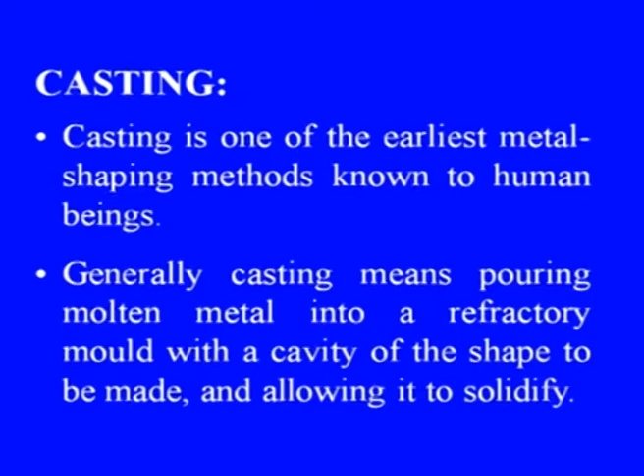Casting is one of the earliest metal shaping methods known to human beings. Generally, casting means pouring molten metal into a refractory mold with a cavity of the shape to be made and allowing it to solidify. Once solidified, the object is taken out from the mold either by breaking or by taking the mold apart. The solidified object is called a casting.

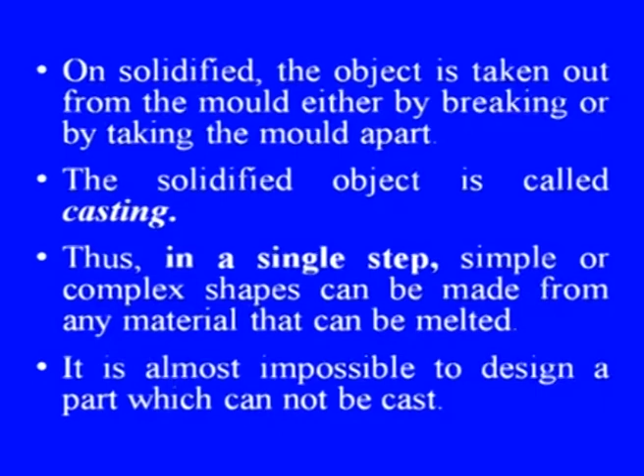Thus, in a single step, simple or complex shapes can be made from any material that can be melted. It is almost impossible to design a part which cannot be cast. Let us see a formal definition of casting. I quote, "A casting is a shape obtained by pouring liquid material into a mold or cavity and allowing it to freeze and thus to take the form of the mold." Unquote.

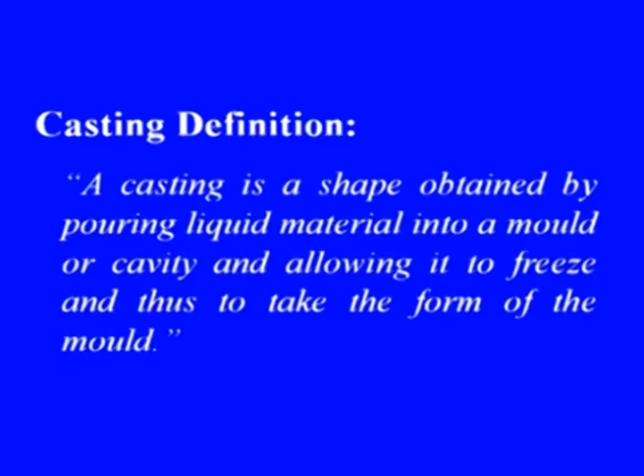Let us peep into a little historical background of this process. Casting was probably discovered around 3500 BC in Mesopotamia. These molds were essentially of a single piece. The Bronze Age, which is estimated at 2000 BC, brought more refinement into the casting process.

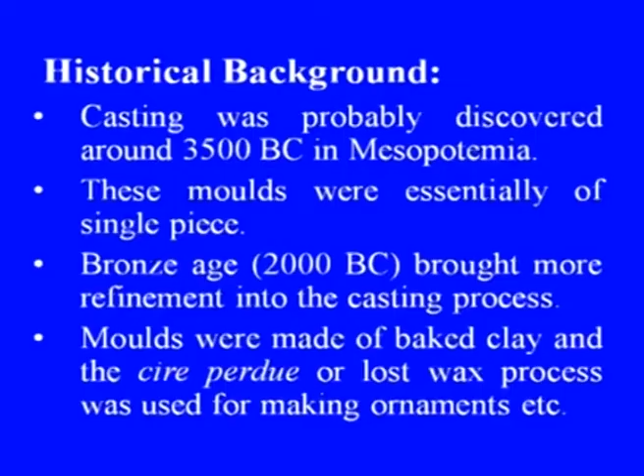Molds were made of baked clay, and the cire perdue or lost wax process was used for making ornaments, etc. The technology was greatly improved by the Chinese from around the year 1500 BC. The Indus Valley civilization has evidence of cast products too. Here is a photograph of a cast mold.

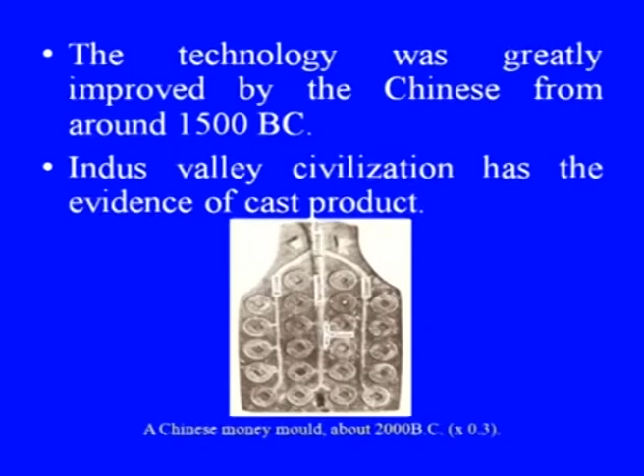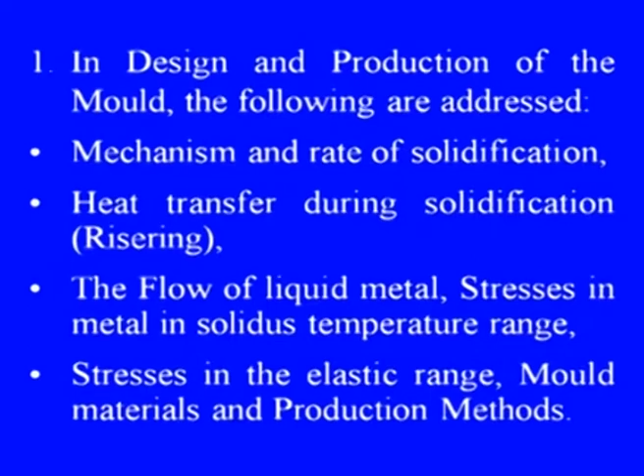Now, let us see the casting problem. The casting problem can basically be divided into two areas: number 1, the design and production of the mold, and number 2, the melting, refining, and pouring of the liquid metal. In design and production of the mold, the following are addressed: mechanism and rate of solidification, heat transfer during solidification, the flow of liquid metal, stresses in the metal in the solidus temperature range, stresses in the elastic range, mold materials and production methods.

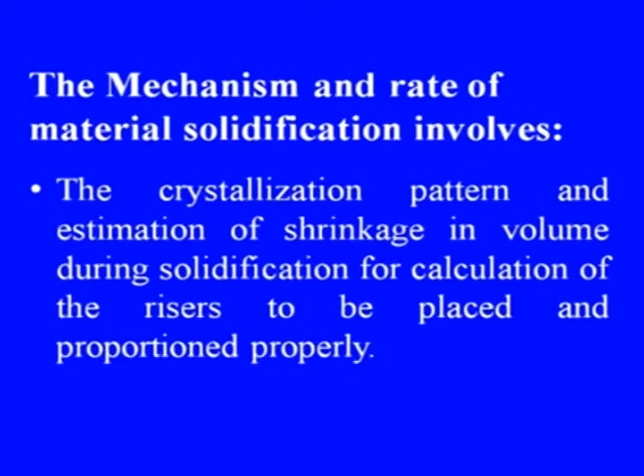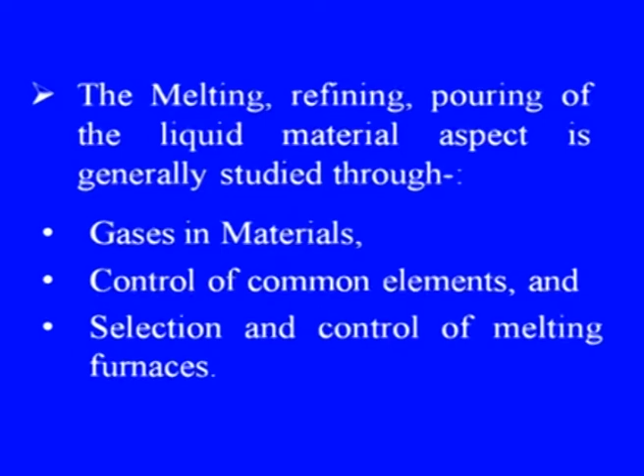The mechanism and rate of material solidification involves the crystallization pattern and estimation of shrinkage in volume during solidification for calculation of the risers to be placed and proportioned properly. These factors vary considerably depending upon the chemical composition of the material and thermal gradients in the mold. Thus, in this process, engineering analysis tools can help significantly. The melting, refining, and pouring of the liquid material is generally studied through number 1, gases in materials, number 2, control of common elements, and number 3, selection and control of melting furnaces.

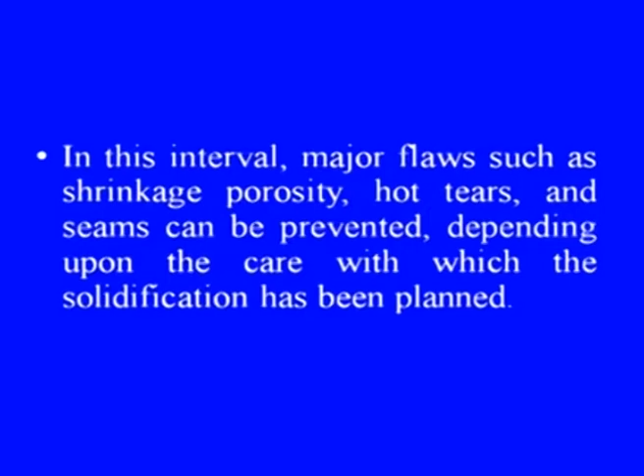Now, let us look into the solidification process. The time taken for solidification of a casting is a relatively very brief period in the entire production history. During this short time, the original crystal structure of the casting is formed, which is considered the backbone of the casting, on which many other properties depend. In this interval, major flaws such as shrinkage porosity, hot tears and seams can be prevented depending upon the care with which the solidification has been planned.

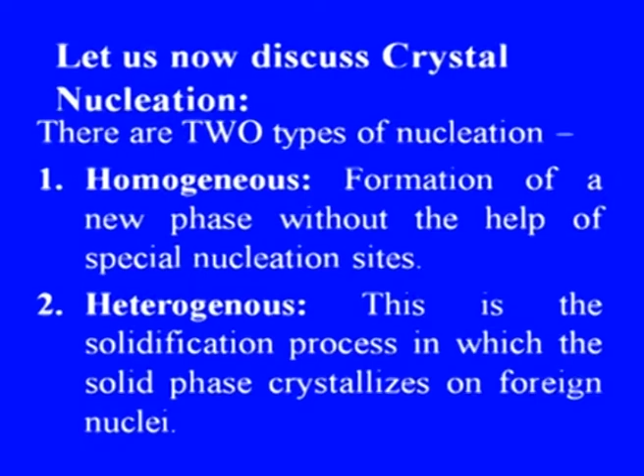Let us now discuss the crystal nucleation process. There are two types of nucleation. Number 1, homogeneous nucleation. Homogeneous nucleation is the formation of a new phase without the help of special nucleation sites. Number 2, heterogeneous nucleation. In the heterogeneous nucleation process, the solid phase crystallizes on foreign nuclei.

The temperature at which homogeneous nucleation takes place is always below the equilibrium freezing point, because it is necessary to overcome the surface tension forces which slow down nucleus growth. The energy required to produce a nucleus of solid is the difference in free energy per unit volume between the liquid and the solid phases. This energy, also called the bulk free energy change, is designated as delta F(V), which is expressed in calories per cubic centimeter for a given temperature of supercooling.

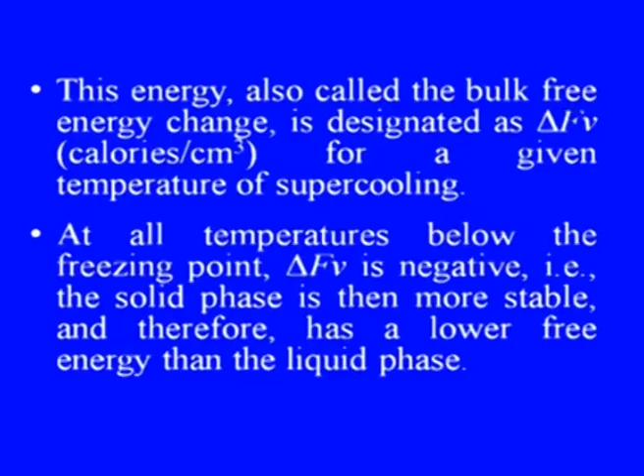At all temperatures below the freezing point, delta F(V) is negative, that is, the solid phase is then more stable and therefore has a lower free energy than the liquid phase. The bulk free energy change associated with the formation of a spherical particle of radius r is given by 4/3 pi r cube into delta F(V).

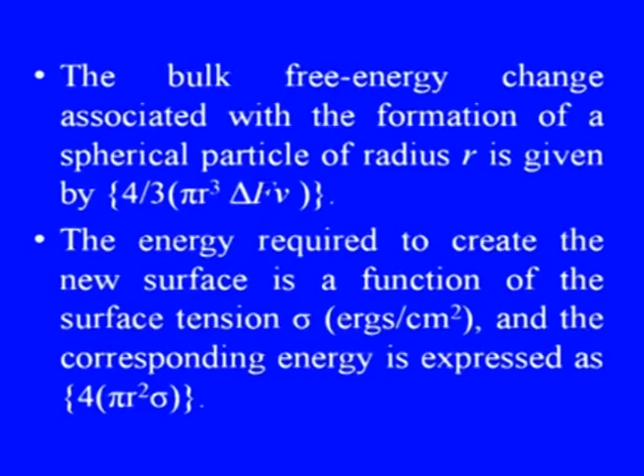The energy required to create the new surface is a function of the surface tension sigma, which is expressed in ergs per centimeter square, and the corresponding energy is expressed as 4 pi r square into sigma. The net free energy change, delta F, is then expressed as delta F equals 4 pi r square sigma plus 4/3 pi r cube delta F(V).

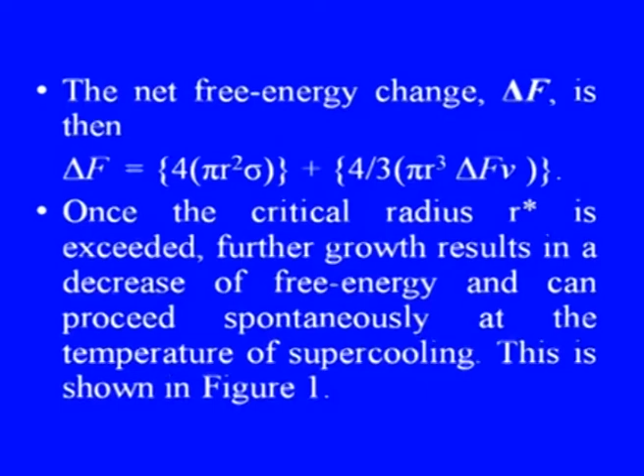Once the critical radius r star is exceeded, further growth results in a decrease of free energy and can proceed spontaneously at the temperature of supercooling. This is shown in figure 1. Here, this is the critical radius r star.

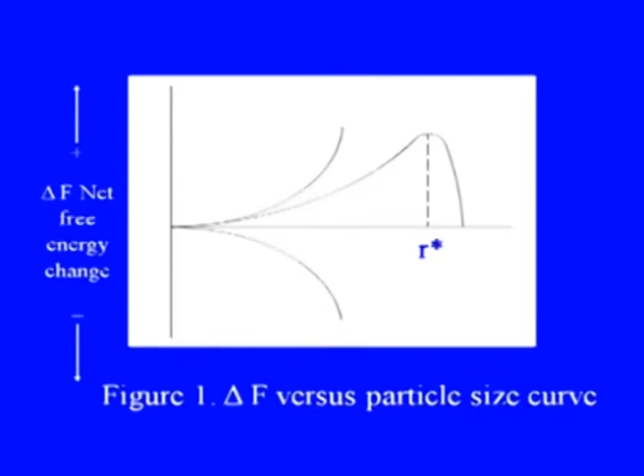If a particle has a radius smaller than r star, it will redissolve because this decrease in size reduces the free energy. The size of the critical radius may be found by differentiating the above relationship with respect to r and setting the result equal to 0, which then yields r star to be equal to minus 2 sigma by delta F(V).

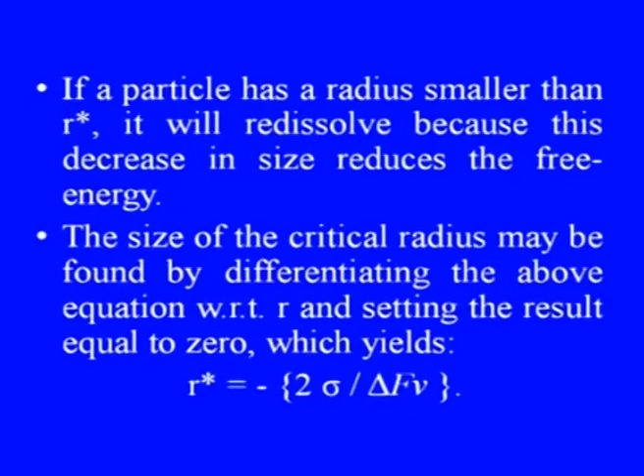The r star relation indicates that for r star to become very small, delta F(V) must become very large in a negative sense. That is, severe supercooling is needed for homogeneous nucleation. Also, the term sigma does not change greatly with temperature. On the other hand, delta F(V) increases with supercooling and therefore causes a very small nucleus to be stable.

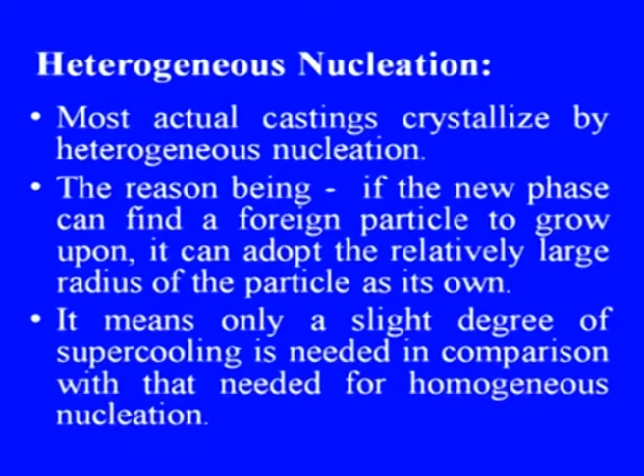Let us come into the heterogeneous nucleation process. Most actual castings crystallize by the heterogeneous nucleation process. The reason being, if the new phase can find a foreign particle to grow upon, it can adopt the relatively large radius of the particle as its own. It means only a slight degree of supercooling is needed in comparison with that needed for homogeneous nucleation.

Quantitatively, the relation depends upon the degree to which the new phase wets the foreign particle. If there is no attraction between the atoms of the foreign particle and those of the precipitating phase, then nucleation is not helped. The wall of a mold usually provides many heterogeneous nucleation sites. That is how the solidification process begins.

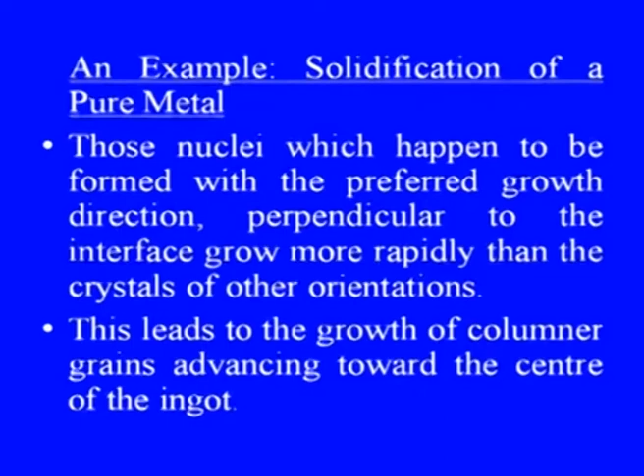Let us see an example of solidification of a pure metal. Those nuclei which happen to be formed with the preferred growth direction perpendicular to the interface grow more rapidly than the crystals of other orientations. This leads to the growth of columnar grains advancing towards the center of the ingot. The final structure therefore consists of a thin layer of randomly oriented grains at the mold surface and columnar grains extending to the center line. In this situation, there are no randomly oriented grains at the center of the ingot.

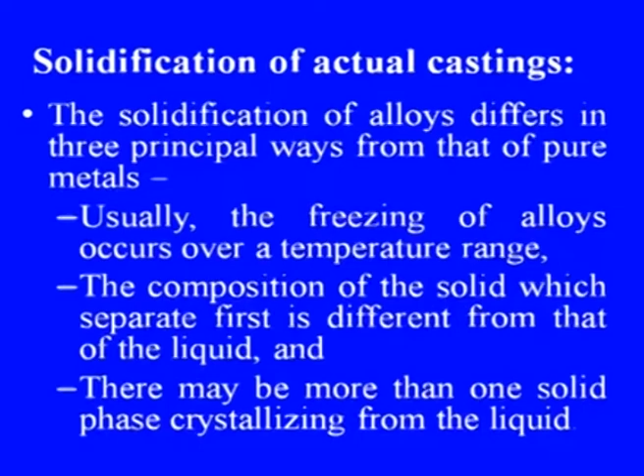Solidification of actual castings. The solidification of alloys differs in three principal ways from that of pure metals. Number 1, usually the freezing of alloys occurs over a temperature range. Number 2, the composition of the solid which separates first is different from that of the liquid. And number 3, there may be more than one solid phase crystallizing from the liquid.

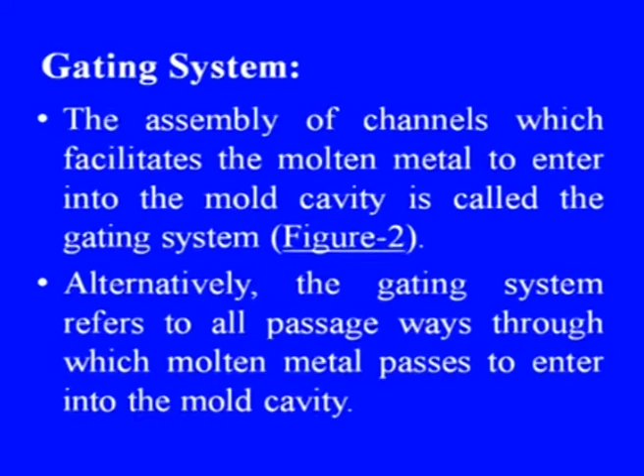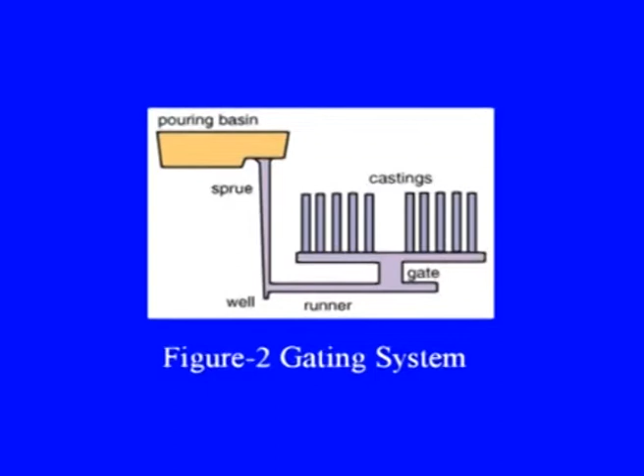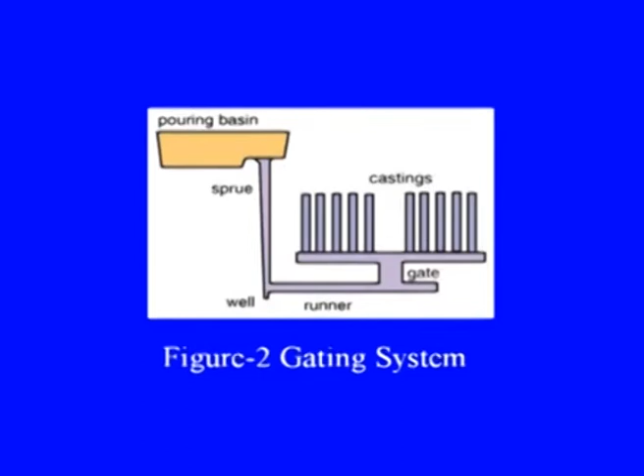Now, let us see a gating system. The assembly of channels which facilitate the molten metal to enter into the mold cavity is called the gating system. This is shown in figure 2. Alternatively, the gating system refers to all passageways through which molten metal passes to enter into the mold cavity. This is a typical gating system in which this is the pouring basin. The molten metal comes through the sprue, which is constructionally tapered in shape. Then the liquid metal is distributed through this gating system into the various cavities.

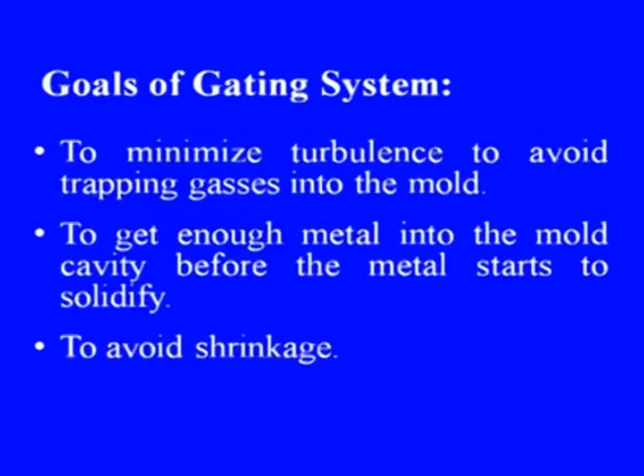What are the goals of the gating system then? This is to minimize turbulence to avoid trapping gases into the mold. Then to get enough metal into the mold cavity before the metal starts to solidify. Then another goal is to avoid shrinkage. To establish the best possible temperature gradient in the solidifying casting, so that the shrinkage, if it occurs, must be in the gating system, not in the required cast product. Thereby, it helps in retaining the appropriate or desired tolerances.

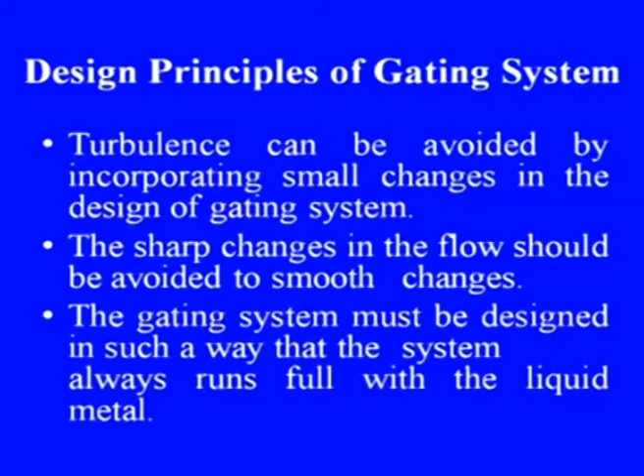It also incorporates a system for trapping the non-metallic inclusions. The major design principles of the gating system are as follows. Turbulence can be avoided by incorporating small changes in the design of the gating system. Sharp changes in the flow should be avoided in favor of smooth changes. The gating system must be designed in such a way that the system always runs full with the liquid metal. In gating system design, sharp corners should be avoided. Any changes in direction or cross sectional area should make use of rounded corners.

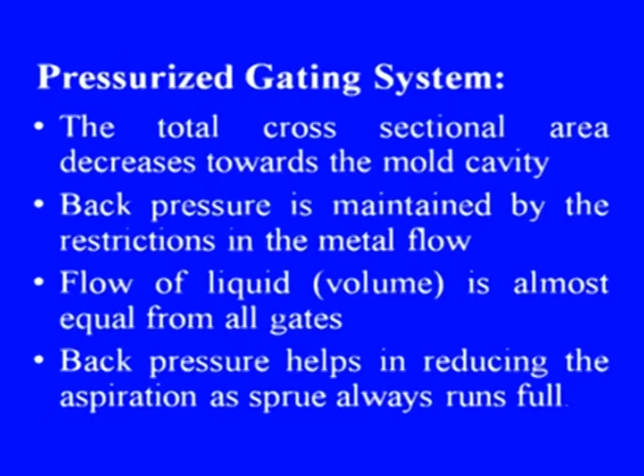To avoid aspiration, tapered sprues are designed in the gating systems. A sprue tapered to a smaller size at its bottom will create a choke, which will help keep the sprue full of molten material. Types of gating systems. The gating systems are of two types: pressurized gating system and unpressurized gating system. In the pressurized gating system, the total cross sectional area decreases towards the mold cavity. Back pressure is maintained by the restrictions in the metal flow. Flow of liquid is almost equal from all gates. Back pressure helps in reducing the aspiration, as the sprue always runs full.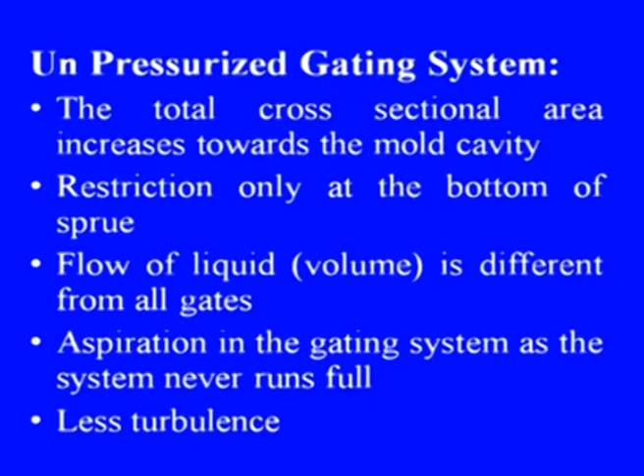Because of the restrictions, the metal flows at high velocity, leading to more turbulence and chances of mold erosion. In an unpressurized gating system, on the other hand, the total cross sectional area increases towards the mold cavity. Restrictions are only at the bottom of the sprue. Flow of liquid is different from all gates. Aspiration in the gating system, as the system never runs full, there is less chance of turbulence.

Now, let us consider the risering system. A riser is a reservoir of extra metal which flows from the riser to the mold cavity to compensate for shrinkage, which takes place in the casting when it starts solidifying. Without a riser, heavier parts of the casting will have shrinkage defects either on the surface or internally. Risers are known by different names such as metal reservoirs, feeders or headers.

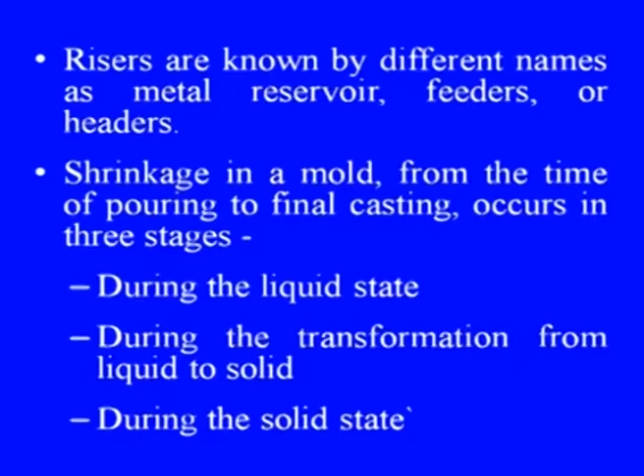Shrinkage in a mold from the time of pouring to final casting occurs in 3 stages. Number 1, during the liquid state. Number 2, during the transformation from liquid to solid, and number 3, during the solid state. The first type of shrinkage is compensated by the feeders or the gating system. For the second type of shrinkage, risers are required. Risers are normally placed at that portion of the casting which is last to freeze. A riser must stay in liquid state at least as long as the casting and must be able to feed the casting during this time.

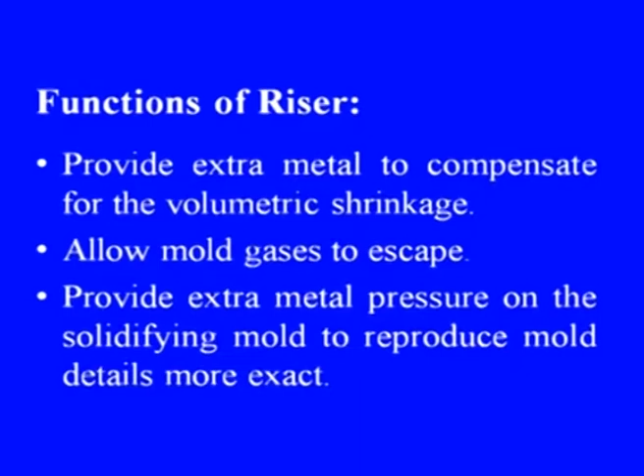Now, let us see the functions of a riser. It provides extra metal to compensate for the volumetric shrinkage. Then, risers allow mold gases to escape. They provide extra metal pressure on the solidifying metal to reproduce mold details more exactly.

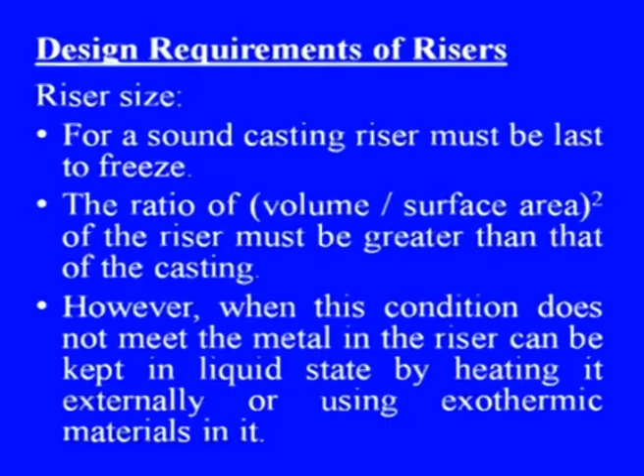Now, what are the design requirements of risers? First is the riser size. For a sound casting, the riser must be the last to freeze. The ratio of volume to surface area of the riser must be greater than that of the casting. However, when this condition is not met, the metal in the riser can be kept in liquid state by heating it externally or using exothermic materials in it.

The way the riser is connected to the casting is very important. The connection, called the neck, should solidify first, so that the shrinkage cavity is located in the riser itself. The removal of the riser can be made simpler by making the neck smaller. But if the neck is too small, it might get solidified earlier than the casting, hence defeating the whole purpose. A normal practice is to provide a thin ceramic or core material for the neck to reduce the cross sectional area. These are called Washburn cores.

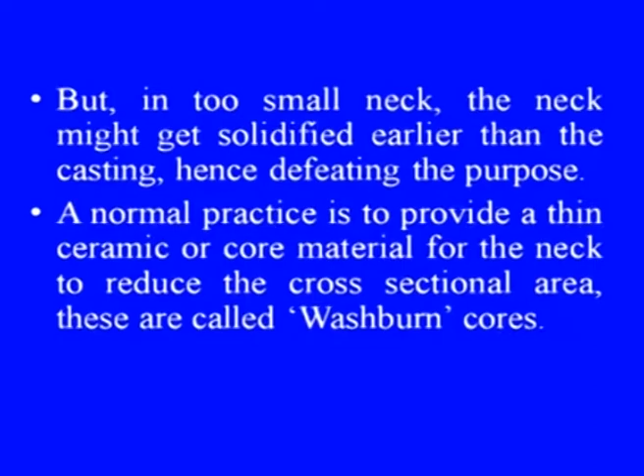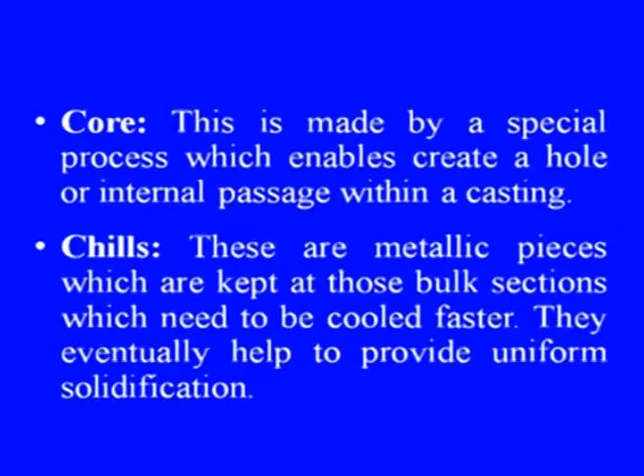Then chills. These are metallic pieces which are kept at those bulk sections which need to be cooled faster. They eventually help to provide uniform solidification. In other words, in heat transfer terminology, we can call these nothing but some kind of heat sinks, like we use fins in some cases. So, these metallic materials provide a larger area which is in contact with the heated object or in the vicinity of the heated object, so that the rate of heat transfer can be faster. As we know, rate of heat transfer is proportional to the area of heat transfer. Therefore, this is nothing but a technique to enhance the heat transfer area.

So, what is the advantage of this? The advantage is, as the rate of heat transfer becomes faster, the solidification can be homogeneous. Otherwise, in some cases where the section is thicker, the quantity of molten material is higher, and therefore it may take more time to get solidified, or rather to reject the heat from the molten metal and thereby get solidified. However, with the use of chills, this can be avoided, by providing a higher area for heat transfer, and thereby the rate of cooling becomes faster, and consequently the entire body of the casting can get cooled at a more uniform rate with that of the thin sections, which are in any way getting cooled fast.

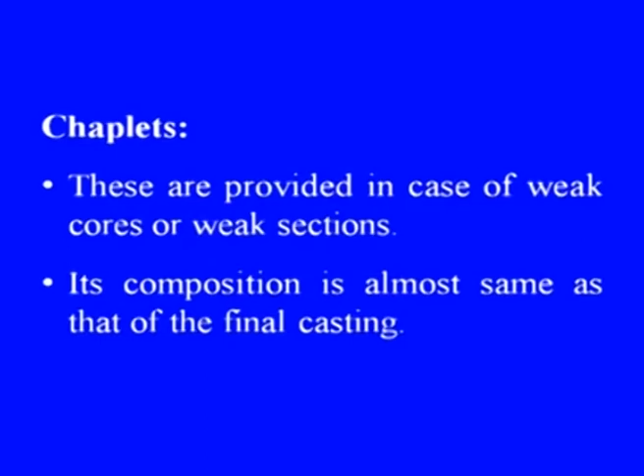Another important term quite often used is chaplets. These are provided in case of weak cores or weak sections, as we have just now discussed. The cores are nothing but some holes or the passages provided. So, therefore, by providing passages, in some cases it may so happen that the section becomes very weak, which may not eventually be possible to withstand the load of molten metal. Therefore, these chaplets are used to strengthen these weak sections.

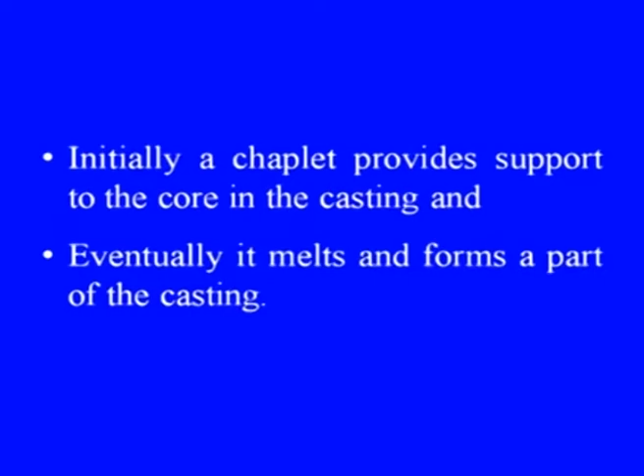Its composition is almost the same as that of the final casting, so that the diffusion or other problems are minimized. Initially, a chaplet provides support to the core in the casting, and eventually it melts and forms a part of the casting. That is why a similar composition is preferred, so that the cast product does not lose the properties, or the properties of the final product do not deviate from what is designed.

Another important one is the pattern, which we will be using almost in every session that will be discussed in this module. It is the replica of the required cavity or shape. It resembles the required casting with allowances in it. It is made of wood, metal, wax or plastics as the situation permits. Say, for example, if we use wax, it is lost because of coming in contact with the very high temperature molten material. On the other hand, if metallic patterns are used, they can be reused for several cycles.

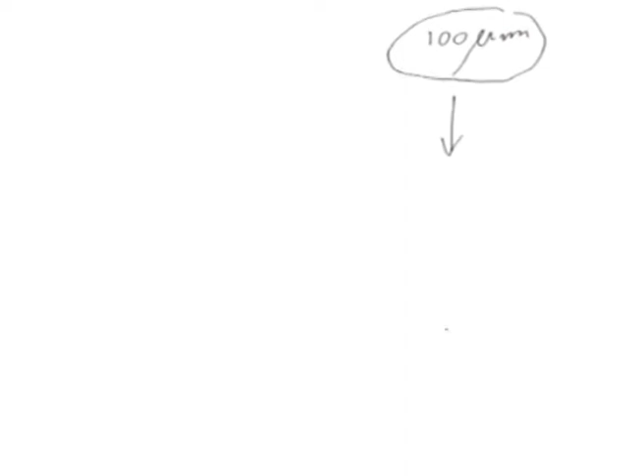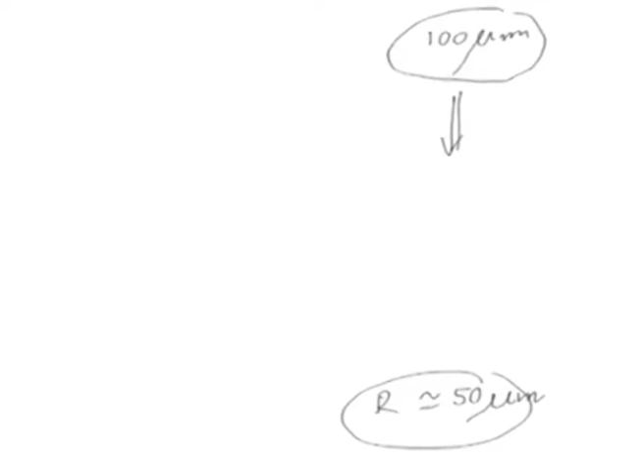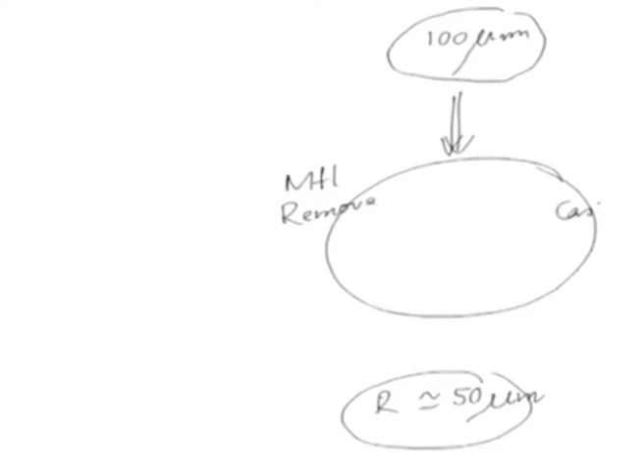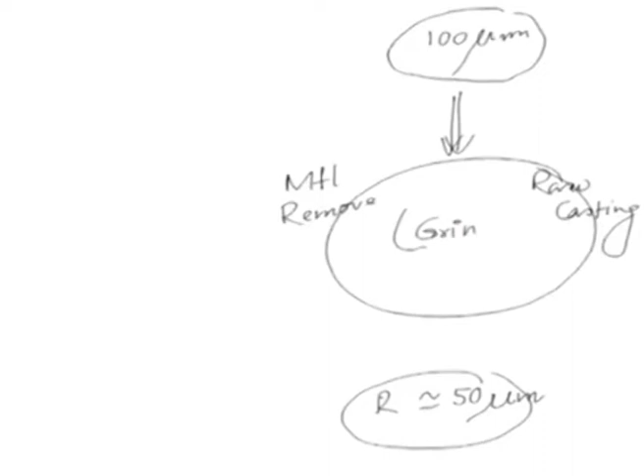Another important aspect in this pattern is the final finishing. Some of the patterns may need post processing, say, for example, to achieve some prerequisite surface finish, say from Ra equal to 100 micrometer to Ra equal to 50 micrometer. What I need is, in between, some reworking, where I have to remove some material from the original cast, or we can say this is the raw casting. This process may be, say, grinding or some other finishing process.

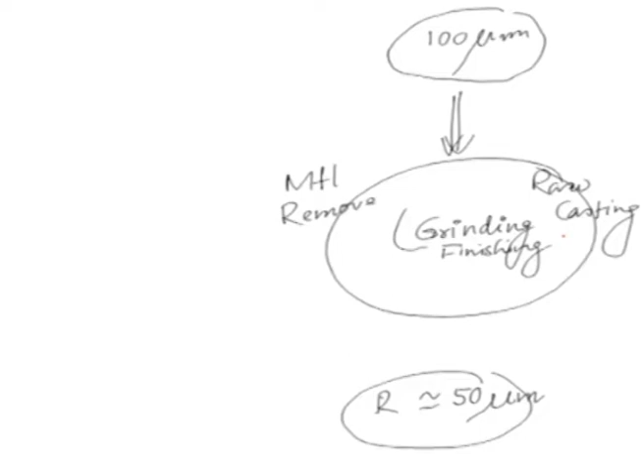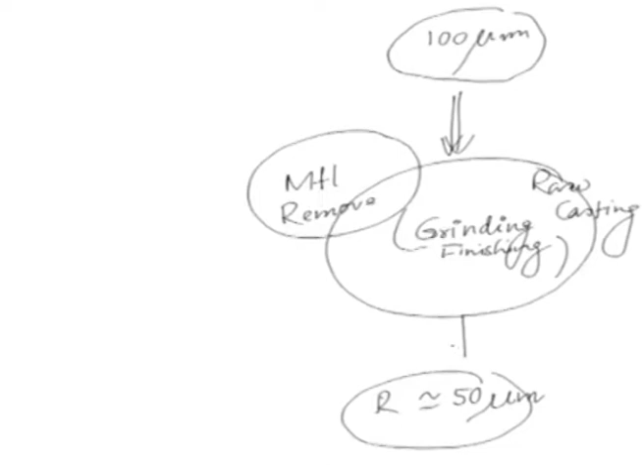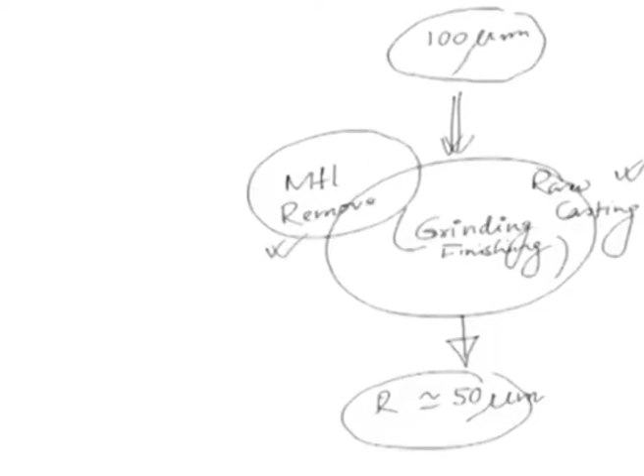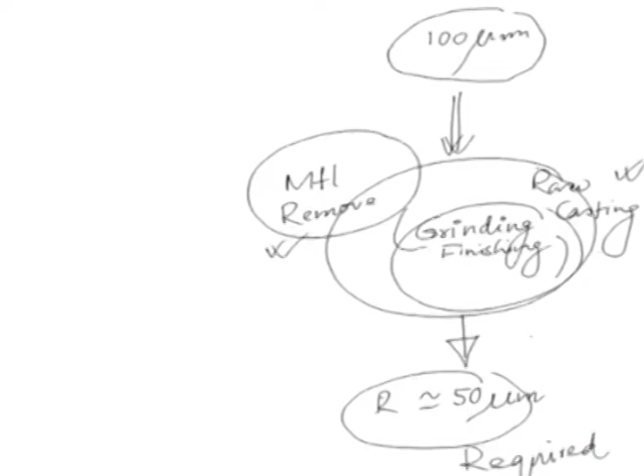Now, from where will this additional material be sacrificed? This indicates that we may have to allow some additional material in the raw casting itself. That means the pattern has to be made a little oversized, so that it produces a little bigger casting than required, and this additional material will be removed as part of the finishing process, as we have discussed here, which will ultimately give us the required dimension. This is the required dimension.

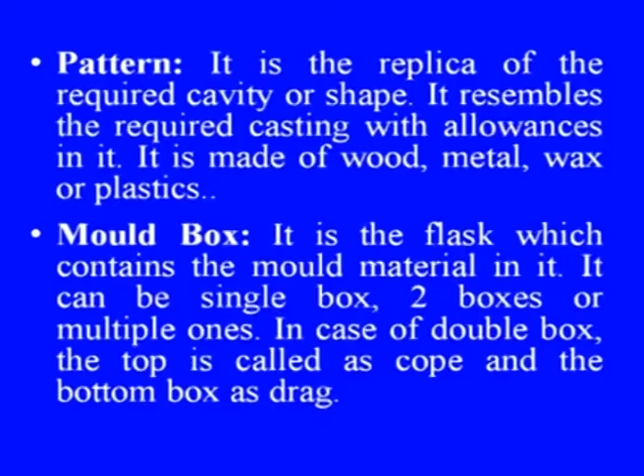Another important term very closely associated with molding technology or casting technology is the mold box. It is the flask which contains the mold material in it. It can be a single box or two boxes or multiple ones. In case of a double box, the top is called the cope and the bottom box is called the drag. Then molding material. In most cases, sand is the desired molding material, since it has high refractory property as well as being cheap. Sand is mixed with other ingredients as desired, like to make it more flowable, or in some cases to make it more binding, binders are used, and so on.

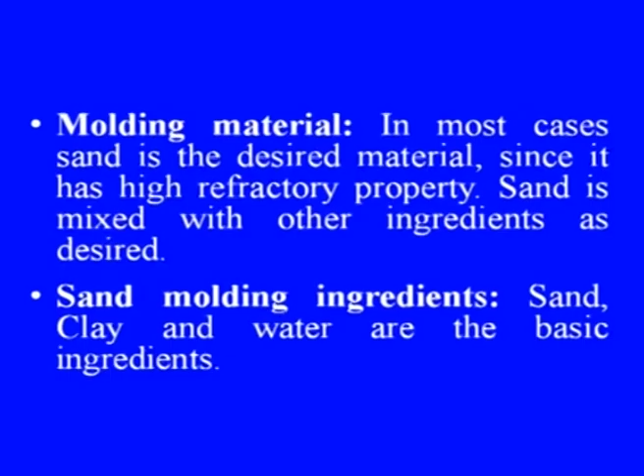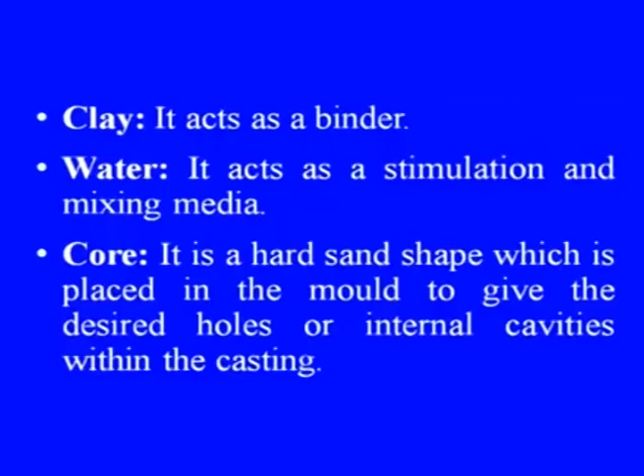Then sand molding ingredients. These are sand, clay and water. These are some of the ingredients. In some cases, some other materials as binder are also used, like clay content, etc., to give the binding properties. Then the core. What is a core? It is a hard sand shape which is placed in the mold to give the desired holes or internal cavities.

What is a core print? This is another important term. It is the region added to the core or pattern, usually at its ends, which helps it to seat in the cavity in the proper region. Then core seat. The corresponding section in the mold where the core print gets located is called the core seat.

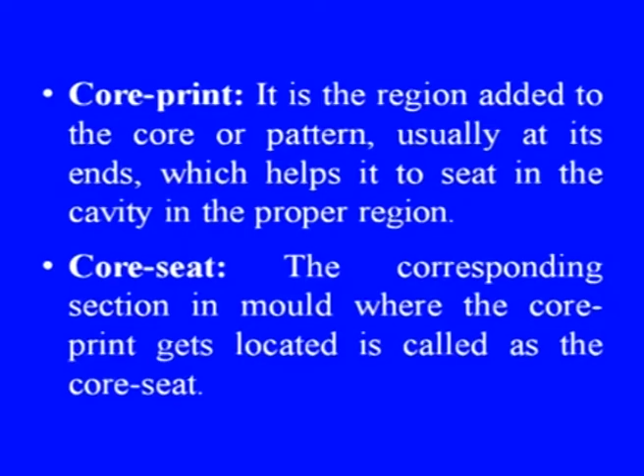Another important term is ladle. Ladle is a device having a crucible with handles at its ends. It is used to carry the molten metal from the furnace to the molds. There are different types of ladles to suit different requirements. So, this is a generalized picture as displayed on the screen.

So, here we can notice, as we have already indicated, this is the largest section of this particular casting, as the figure shows. Therefore, it ideally contains more quantity of molten material, and it will take longer to solidify, because the heat content will be high and this contained heat has to be transferred out, provided the area through which the heat is transferred remains the same.

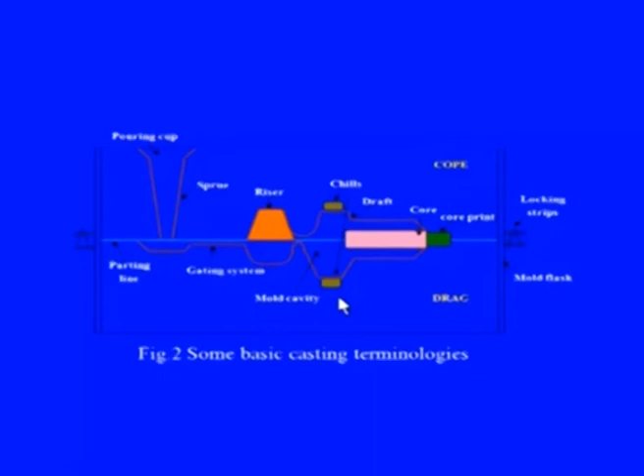To improve upon this situation, because this casting has different sections, some sections are relatively smaller than this section. Therefore, there is a possibility that the thinner sections will solidify earlier than the larger sections. To eliminate this inhomogeneity in solidification, these chills are provided, as can be seen here. These are metallic plates which act as heat sinks and provide a better heat transfer rate in these large sections, so that the non-uniformity in the rate of heat transfer at different sections of the casting is reduced.

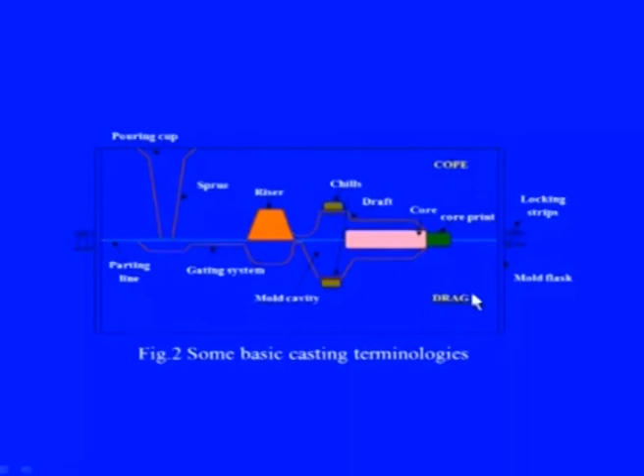And as far as the box is concerned, I was talking about it just a few minutes back. In this particular figure, there are two boxes provided. One is called the cope, the top box, and this is the parting line, and this lower half of the box is called the drag. Next is the pouring cup or pouring basin. This we have seen in the figure just now. It is the initial region in the gating system which first receives the molten metal from the ladle and allows it to move through.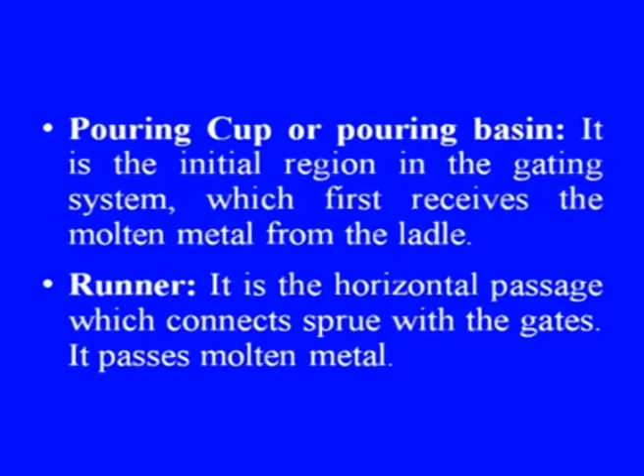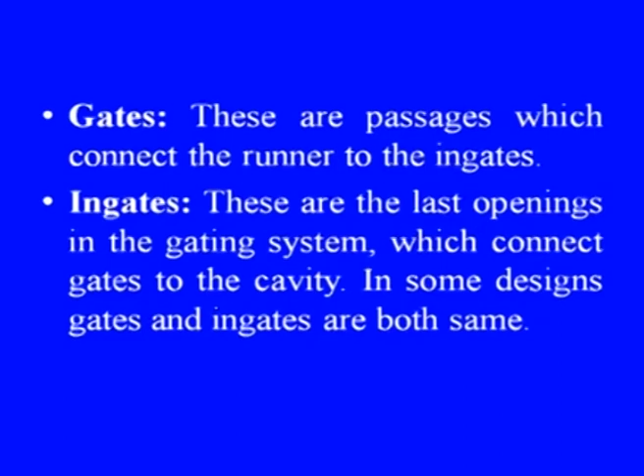Then the runner, it is the horizontal passage which connects the sprue with the gate. It passes molten metal to the subsequent sections. Then the gate, these are passages which connect the runner to the ingate. Ingates are the last openings in the gating system which connect the gate to the cavity. In some designs, the gate and ingate are the same. So, this is a typical gating system we were talking about.

So, this is the sprue, and this is the pouring cup, and from the ladle the liquid molten material will be poured here. This will facilitate the molten material to flow through, and this is the gate through which the material will be delivered to the cavity where the casting is to be produced, and these are the ingates. A number of branches are created so that the distribution of the molten material will be at a uniform rate, and of course, this will help in maintaining uniform temperature as far as possible while delivering.

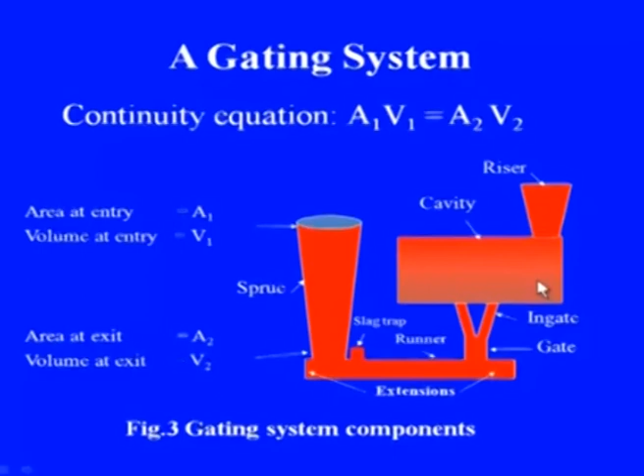And this is the riser, which provides additional molten material so that during solidification, if the molten material shrinks, which usually happens, since liquid occupies more volume in most cases and the volume shrinks during solidification, then to fill the remaining portion, this riser provides additional molten material which it keeps as a reserve, so that no void or volume is left unfilled inside the casting because of the solidification.

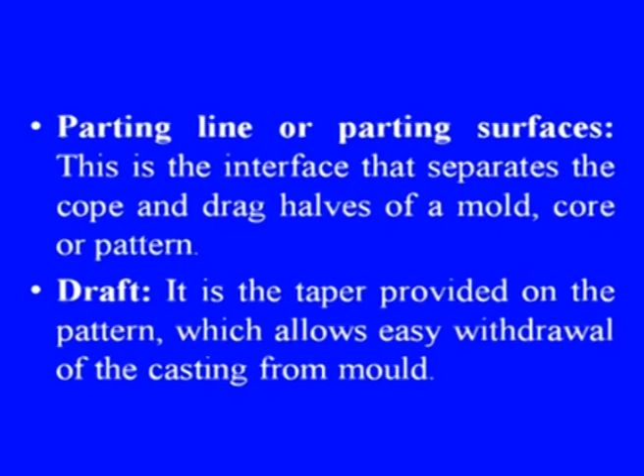Then another very important terminology as far as casting is concerned is the draft. It is the taper provided on the pattern which allows easy withdrawal of the casting from the mold. This we can see in the previous figure as well, as a taper.

Now, let us summarize what we have discussed in this particular session. We have discussed the basic features and terminologies in the casting process, gating and risering systems and their design aspects, and the basics of solidification or casting formation. We hope this session was informative and interesting. Thank you.